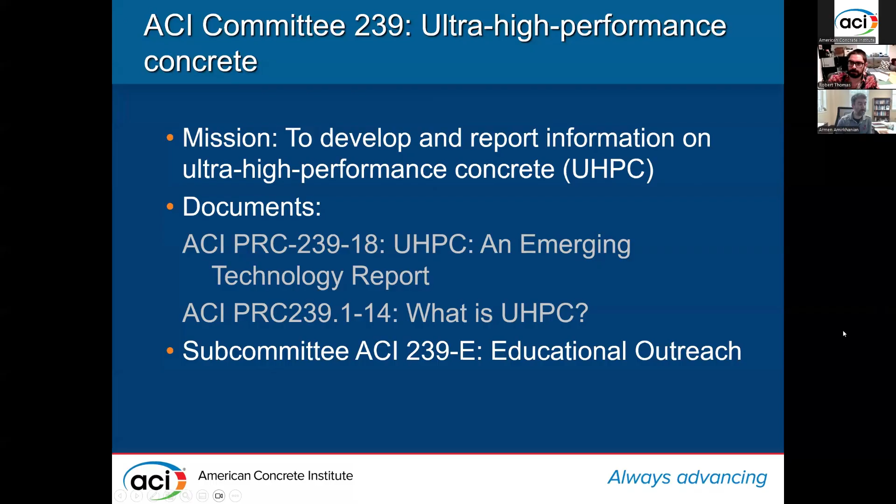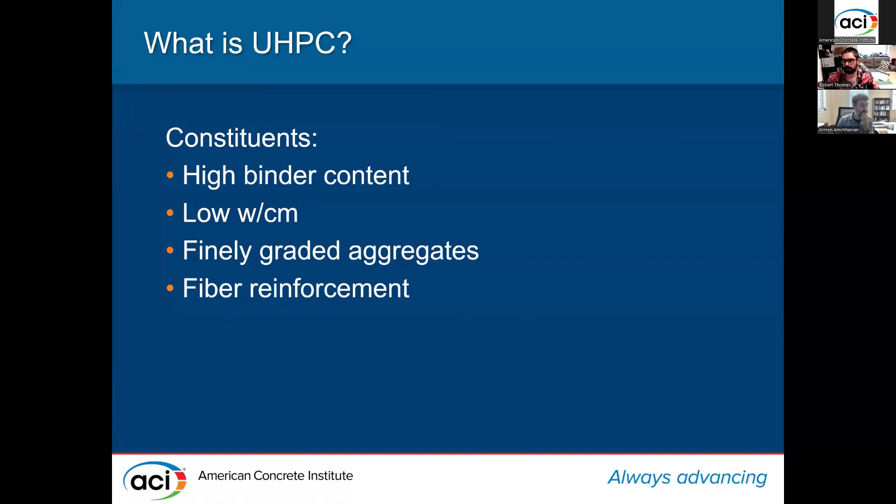So let's briefly talk about what UHPC is. From a constituent standpoint, typically UHPC has high binder content, low water cement ratio, finely graded aggregates, and carefully graded aggregates for particle packing. It's typically going to include fiber reinforcement. That tends to get you some pretty impressive performance.

We define UHPC within ACI as at least 17,500 PSI, or 120 megapascals, compressive strength, 720 PSI or 5 megapascals tensile strength. More importantly, a capacity for post-cracking tensile strength. UHPC typically has extremely good durability, and one of the reasons for this competition is UHPC is known for extremely good impact resistance. That's the property we're hoping to leverage through this competition.

I do want to note, though, that nothing in the rules says your UHPC mixtures need to meet any or all of these requirements. I think it's good for you to shoot for a UHPC mix that fits these criteria, but it is certainly not a requirement.

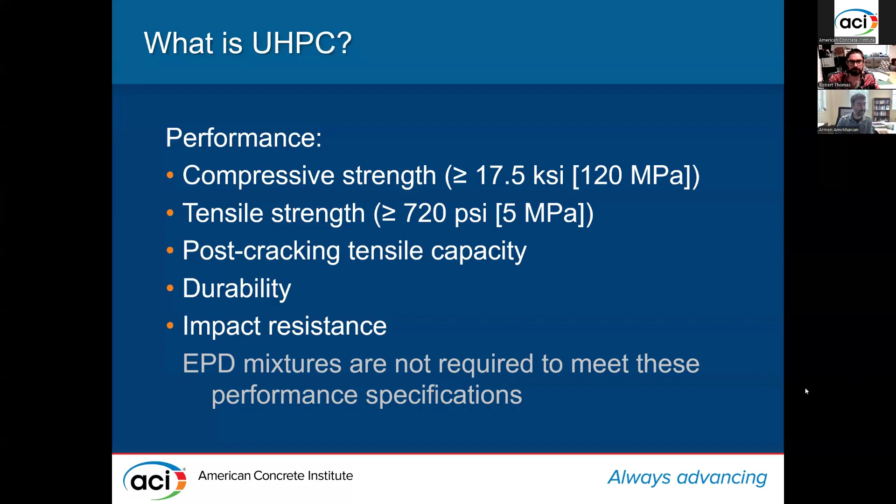The rules have been posted for a while, and I didn't want to just go through the rules and read them to you, but I wanted to point out a few critical things, and the first was materials. There have been a few questions that have come in about materials.

I want to briefly talk about the two options you have. One is to use a proprietary UHPC product, and the other is to come up with a non-proprietary or homemade UHPC mixture. If you're going to use a proprietary product, you have to use it as specified by the manufacturer, which means you cannot buy some component and mix it in a proportion that's not recommended, or add components that are not recommended. There are many manufacturers of UHPC materials. We're envisioning that you would contact one of those manufacturers and purchase or ask for donations of their UHPC mixture, and mix and cast it the way they prescribe.

The other option, if you're not going to use a proprietary material, is to come up with your own mixture. This is very encouraged — I'm hoping to see a lot of creativity in mixture design here. Non-proprietary basically means you're going to use individually sourced components and mix them at proportions that you determine. There are a lot of additional guidelines for the materials you can use in the rules. I'm not going to go through all of them; they're fairly specific, and it's up to the teams to make sure they understand what those requirements are.

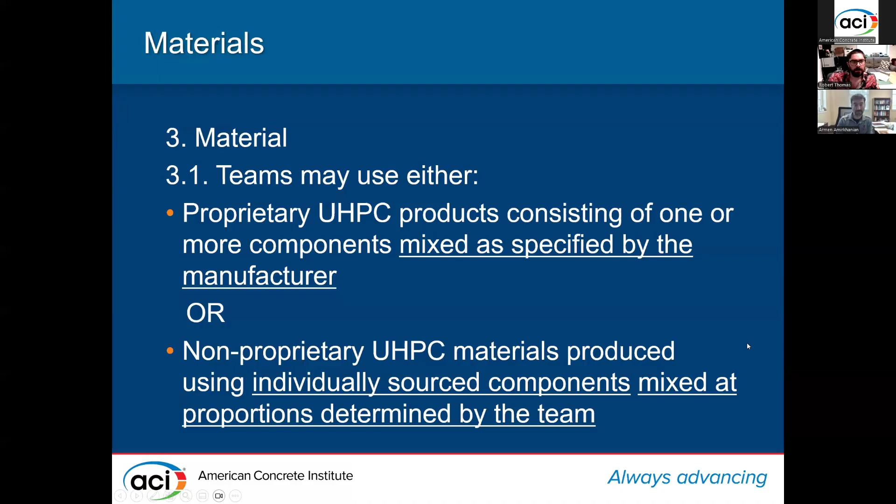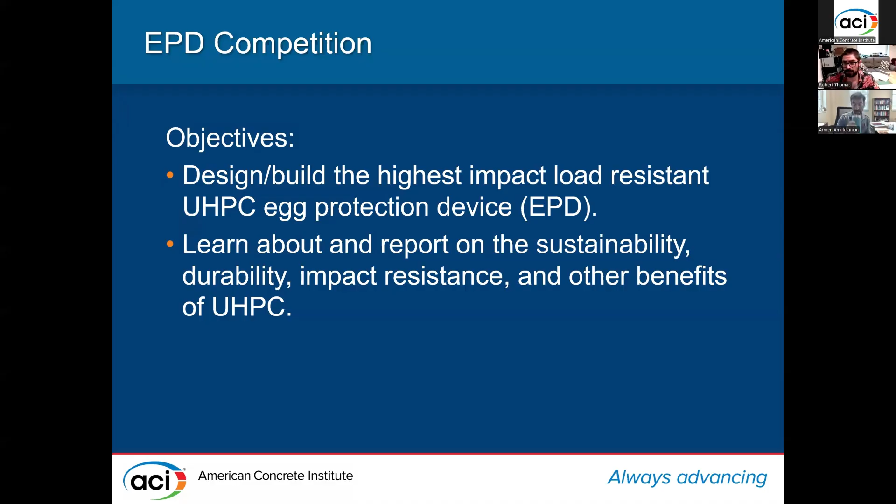The objectives of the competition are to design and build the highest impact load resistant egg protection device. I'll show you a basic egg protection device drawing in a minute, and to learn about and report on sustainability, durability, impact resistance, and other benefits of UHPC. There's also an aesthetics component to the competition, which Armen will describe in a few minutes.

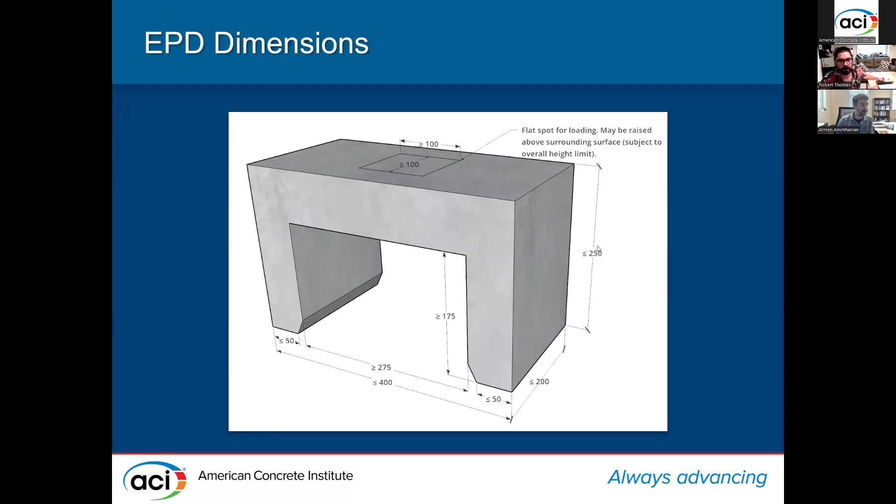There's 3 main parts to the competition, 4 if you include the aesthetics, but the aesthetics will be judged separately, and there's a separate set of rules for that. So for the main part of the competition, the 3 components are the report, the cube test, and the impact test.

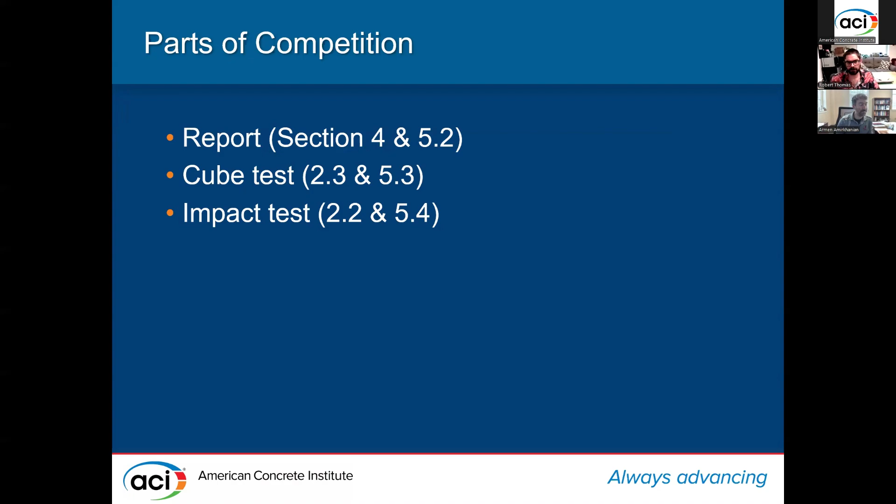For the report, each team needs to prepare a written report, and in the rules we give you a pretty specific structure, and we ask for some very specific things, including mixture details. There's a mixture spreadsheet that you need to fill out that's available on the competition page. There's certain photographs that we need to see because we can't go into your labs and watch you cast these things, so we need you to use photographs to prove that you're adhering to the rules mainly. So please pay close attention to those requirements.

In the rules, we also give you the rubric that we will use to grade your reports. They're slightly vague, but ultimately we tell you how many points each section is worth. And as long as you're adhering to the requirements that we put out for each section, you'll get full credit. So please check those things pretty closely. If you have specific questions about that, please ask them after this or submit them through the FAQs.

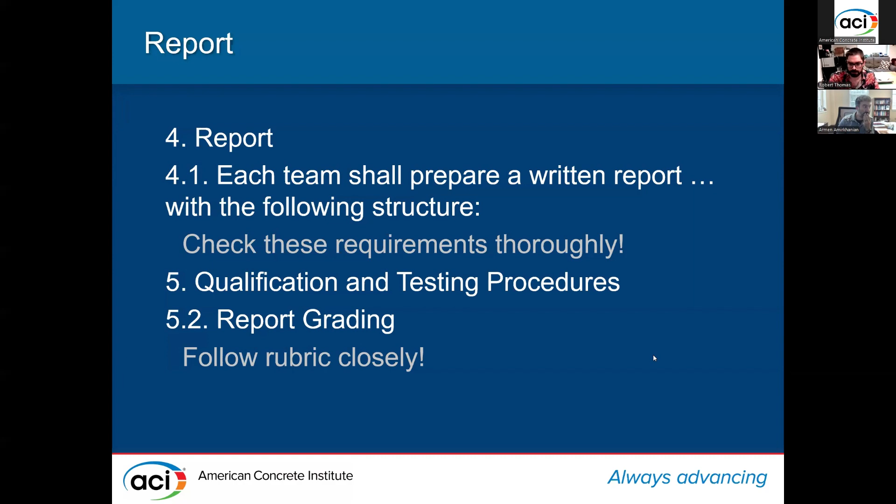The cube test. We're asking each team to bring 3 cubes for compression testing. The cubes should be either 50 millimeter or 2-inch cubes. Either one is fine, but they should be cast from the UHPC matrix only. That means that we want to see the material without the fibers. We want you to cast those cubes because typically the fibers are going to be longer than would be allowable in a 50 millimeter cube.

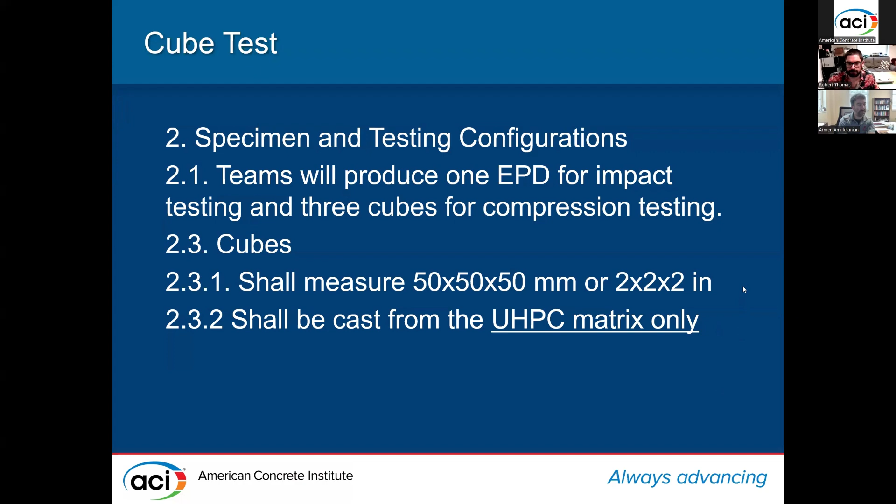Within the report, you need to predict the compressive strength of your cubes. We've gotten several FAQs on this that are basically saying we may not have time to get 28-day compressive strength values. That's okay, actually. We want you to predict the compressive strength of your cubes. That prediction should be based on data, but if you don't have time to get that data, that's okay. There's no requirement for there to be any data, actually. We just want you to predict the compressive strength.

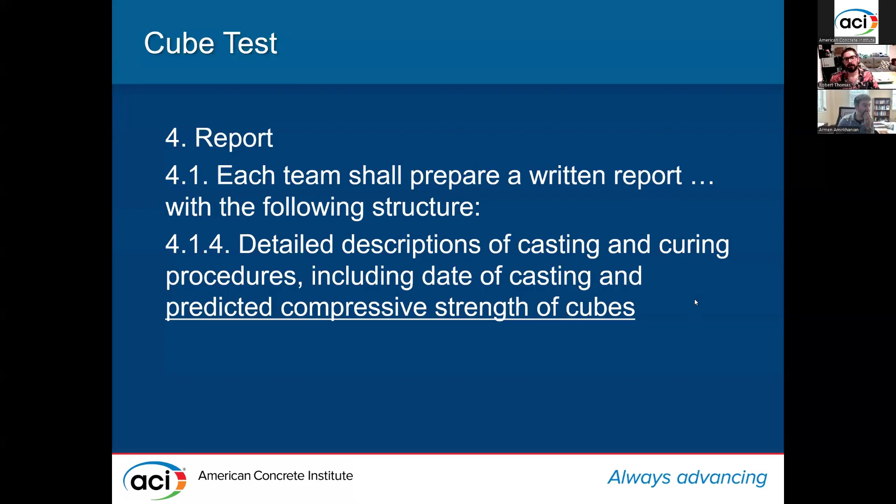And the way we're scoring the cube test, I know there's a lot on the screen here, but pay attention to the bottom couple lines. Your score is going to be based on the percent difference between the average strength that we measure and the predicted compressive strength that you report. So you get a higher score if you're good at predicting the compressive strength. And the score is also going to be based on the percent difference between two measurements. Sorry, it was very early this morning. But basically, if you have a lot of consistency in your mixture and your compressive strength measurements are very close together, you'll get a high score. If you don't have a lot of consistency in your mixture, you'll get a lower score.

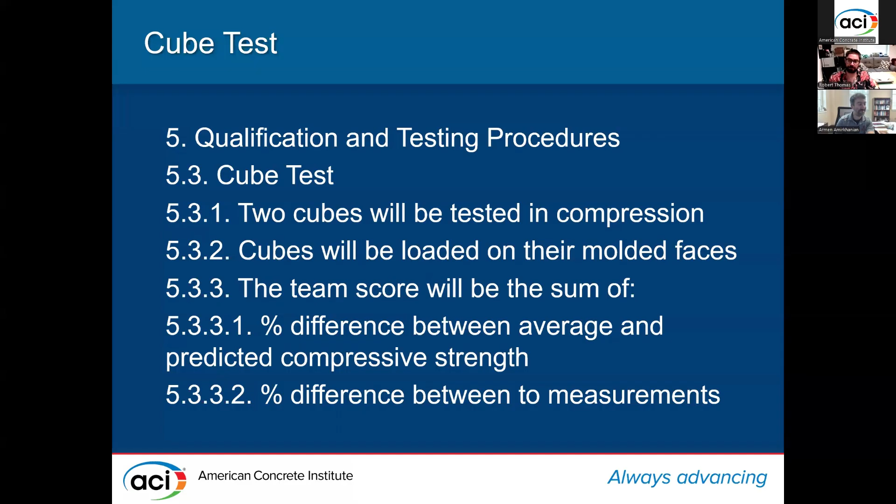The impact test: teams will produce one EPD for impact testing. There are a lot of dimensional requirements for the EPDs, and I'm not going to go through all of those here. We don't have time to go through all the intricate details, but please check them closely. We will be measuring your EPDs, weighing your EPDs, and making sure the clearance in the middle is sufficient. We'll be very careful about making sure you're adhering to the requirements.

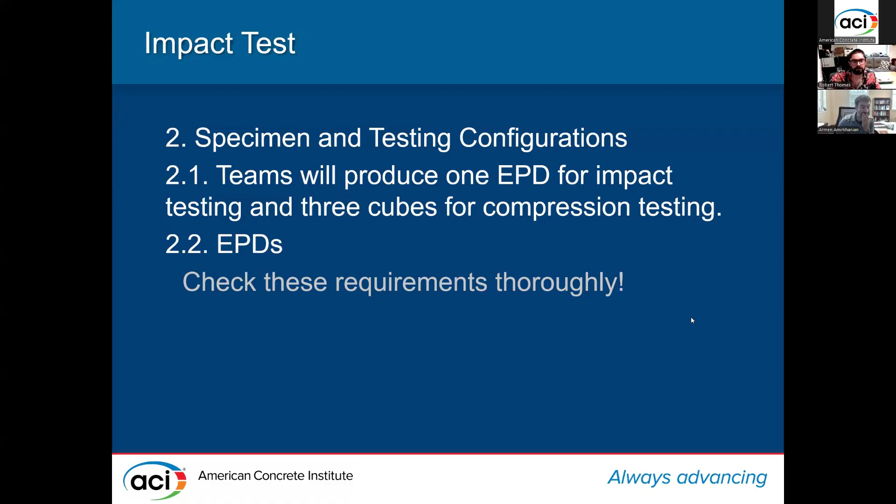For the impact test, EPDs will be loaded by dropping a 5-kilogram chunk of steel right at the midspan, the center of your EPD. Because we don't yet know how many teams there will be, and because we have a limited amount of time for this competition, we don't yet know the exact impact sequence, but it will generally follow dropping the weight from successively increasing heights. We also don't yet know how many drops and how many different heights we will have.

That all is determined by how much time we have to test each individual EPD. After the registration deadline, which is coming up, we have a little over 40 teams registered, but typically not every team submits a report, so at that point the number of teams is kind of fixed. Then we'll be able to determine the exact loading sequence and release that information to you. Right now, the only detail I have is that it'll be a 5-kilogram weight dropped from increasing heights, and I believe the max height we can drop from is about 5 meters.

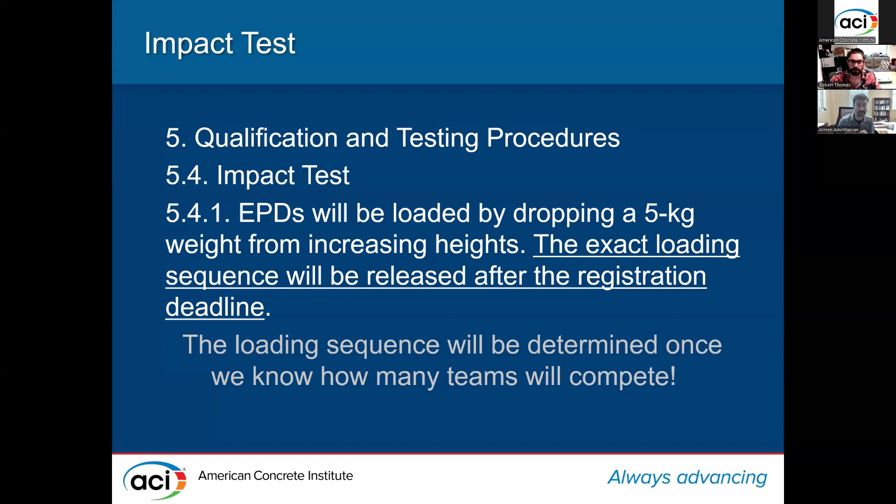Here is the EPD again, and these are the dimensions you need to meet. The big one is the 275 millimeter wide by 175 millimeter tall space in the middle. Those are minimum dimensions, and we will have a plug that is 275 by 175 that we will try to fit through the opening of your EPD. If it does not fit, your team will be disqualified. The other dimensions are equally important, and we'll be measuring those manually with tape measures and calipers. There's also a weight requirement listed in the rules, and we'll be checking weights.

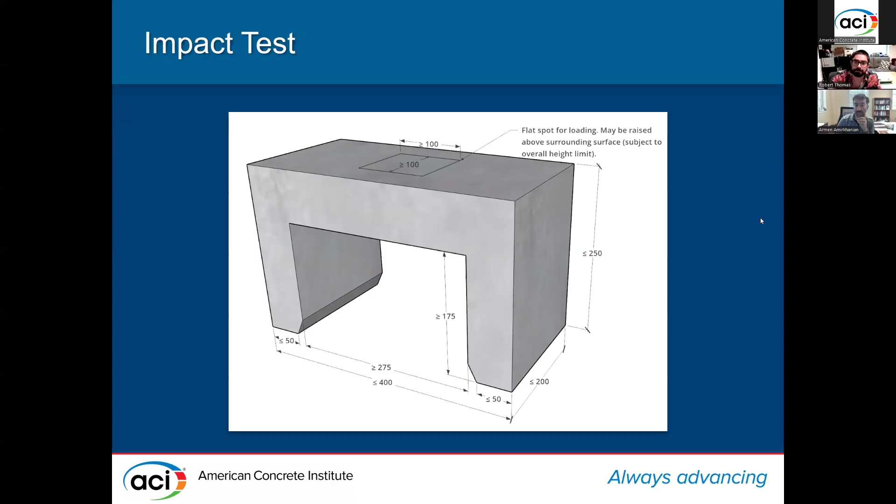So what constitutes failure? Either the egg cracks due to structural damage, or concrete falls. If the egg falls out and cracks just because of vibration, we will replace the egg. But if part of your EPD falls off and breaks the egg, or if the egg breaks due to structural damage, that will be considered failure. Or if the EPD becomes unstable and can no longer support its own weight, that will be considered failed. Ultimately, teams will be ranked by how many impacts they survive to assign score. We do have a tie-breaking procedure in case multiple teams survive the same number of impacts from the same height, so don't worry about that.

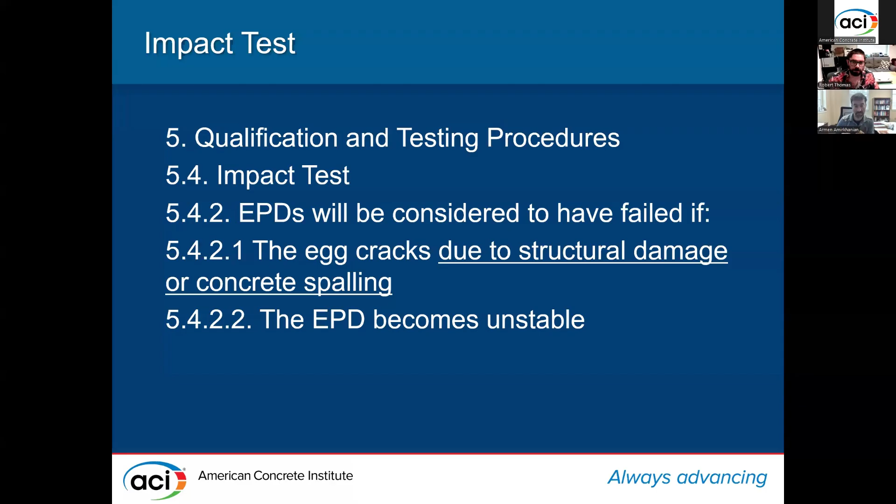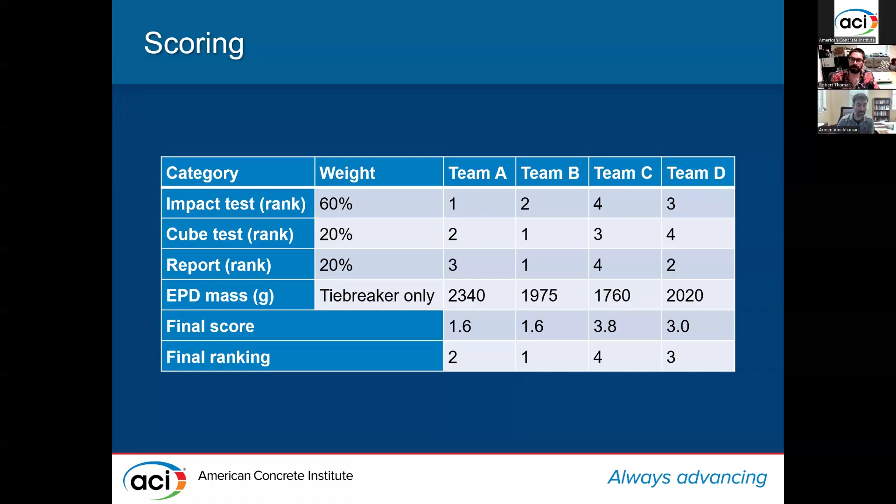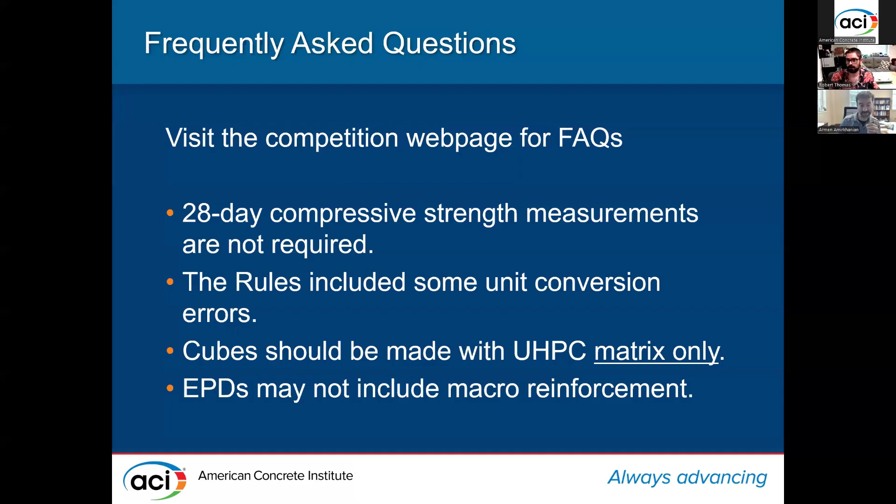Hopefully that is clear. I think that's the end of my slides. Maybe at this point, Arman, do you want to go ahead and say a few things about aesthetics, and then we can open it up for questions?

Yeah, okay, thank you. So for those of you who participated in the bowling ball competition in the spring, that was the first time we had an aesthetics component to a student competition. It was incredible seeing some of those bowling balls—a lot of time and effort went into making them look, I'll just say, pretty cool. It was really exciting to see, and our committee was really excited to see that level of participation.

So we're planning, with the EPD and even other competitions, to try to always have some type of aesthetic component. For the EPD aesthetic component, the key thing is it is your single EPD. I've already answered a question asked regarding whether you have to make two—one as a demo piece, a showcase piece, and one that's tested. You do not. You just bring one EPD.

That's why in the rules there's a requirement to have a photograph of your EPD in its final state, so that during the people's choice judging throughout the day, if your device has already been tested, you will still have a photograph present for people to look at—showing what it looked like prior to testing. A lot of people can still get a sense of your aesthetics even if it's been tested, because they'll physically see it.